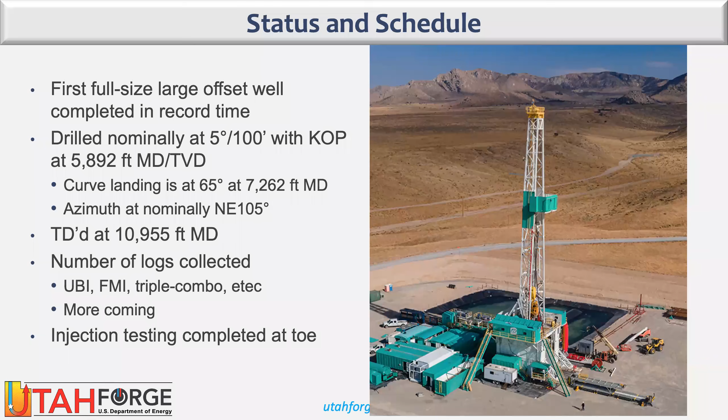The curve landing - as it came out of the curve, it took it all the way down to about 7,200 feet measured depth, and ran at a 65-degree inclination. The total depth of the well was just shy of 11,000 feet. I'll show some of those things here in a schematic.

As I said earlier, the kickoff was at about 6,000 feet. The blue dashed line was the plan, and the slightly curvy line is the actual well trajectory of the well path. We did collect a number of logs here for different stages and levels - we have some ultrasonic borehole imagers, formation microimagers, some standard logs, and a misspelling by Podgorney on the slide. We are intending to collect more logs in the very near future.

Getting equilibrated temperatures in this well as well as some others. We did a number of injection tests at the toe of 16A as well that were completed, and a number of areas of core were collected here, in two different locations in this well. We're pretty happy with it, and we're ready to get started doing some real work in it.

So that's kind of what we're building up to here, with preparing not only the site but also preparing some of the models. So, current and pending infrastructure.

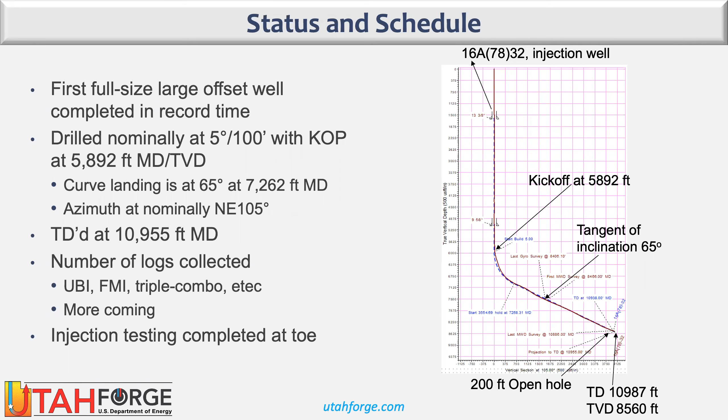Here's an air photo looking from nominally the west, or looking northwest from the northeast, I apologize. This is all on the FORGE site. Our pilot well, the 5832 that was drilled in 2017, this is the pad for that. So this is for reference, and there's our north arrow. A couple other existing features - in white are things that exist right now.

Some seismic monitoring wells exist. Well 16A, 7832, that is our large offset well. This dashed line is the approximate trajectory of that well in the subsurface. It ends right about here. This is in the Magley Wash, essentially a little bit off in the Magley Wash. This well was also just recently drilled.

5632 is a deep seismic monitoring well, drilled to over 9,000 feet measured depth. It's shown here in yellow, along with some additionally planned wells - WOO-1, WOO-2, 16B, essentially our production well. This is our plan for our injection well. A production well would also be planned here on the same pad, and two additional testing/seismic monitoring wells are currently planned. So the near-term schedule - this is what's important here.

These are taking a little bit of wiggle room here, but nominally in June or July of this year, so just coming up next month or the month after, we'll drill WOO-1 here as a deep seismic monitoring well and a testing well for tools and equipment. What's important is getting this done in July, that way we'll have fairly deep coverage at reservoir depth.

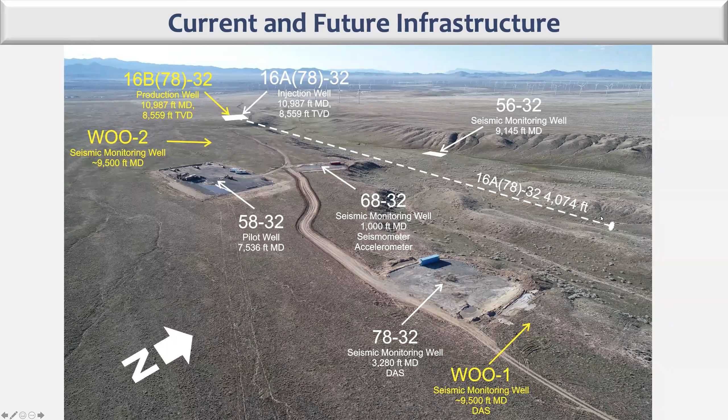The important part is this well will be completed and able to monitor before we begin doing testing in the toe of 16A. So in August, September of this year, we'll stimulate a portion of the open borehole, the open toe of 16A. Additionally, we're planning on doing two cased zones - we'll do some perf, plug and perf, and do some stimulation in different areas in the toe of 16A.

We'll have deployed deep geophone strings. We have distributed acoustic sensors in a number of those deep wells. So we should have really good coverage, really good detection.

Coming in next spring, nominally we just loosely planned for April of next year right now, is drill the production well, the 16B well, to intersect and begin to prepare to do flow testing at the site. Late next fall, October of '22 give or take, stimulate 16A and B as necessary and test newly created reservoir. So that's when things really became really important.

As we go further into the testing, March of 2023, we'll drill that second deep well here - this location is approximate, but drill it in here. Then in April of that year, we can start some long-term circulation tests. So a lot going on, a lot planned for the next 6 to 24 months, give or take, at the site. Very exciting time, lots going on.

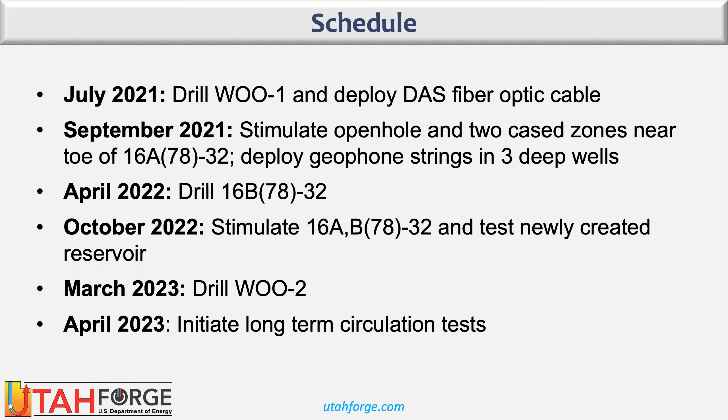Very, very fun. So I want to talk a little bit now about the modeling and simulation that we've been doing and give an update on that as it relates to all that's going on here. But first, I just wanted to introduce the people active in the FORGE modeling and simulation team - and I would say active in the team, because the team has changed as the stages of FORGE have evolved. It's grown, we've had some people come, some people go, but I just want to say who's active right now. I lead the team still.

Alita Finella and Tom Doe at Golder have been working pretty hard on DFN development, stimulation upscaling - or, I've got to hide my camera display here, I'm sorry, it's covering some of my screen, I'm trying to make it go away.

Okay, so back to that. So Alita and Tom at Golder are developing the DFNs, analyzing the logs, doing some stimulation modeling, upscaling of permeability, upscaling of the fracture networks, etc. Branko Damjanac, Zarisa, Murillo at Itasca. They've been focusing on stimulation modeling, stress analysis, MEQ forecasting.

Pengju Xing, Pranay Desai, Alex Gauratrov at the University of Utah, as well as, I don't want to forget to mention, John McLennan, my close collaborator, been doing stimulation modeling as well, stress analysis, looking at well completion, different configurations and different well designs. And lastly, I want to mention some of my colleagues here at the INL, Jerry Liu, Chandu, KT, Lynn, David, Hari.

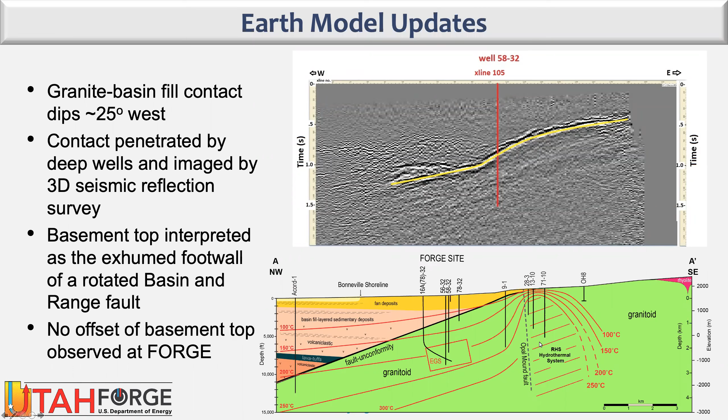We are still waiting on additional data going into the Earth model, things like new temperature logs; we don't have full equilibrium temperature logs from those new wells, but those will all get built in as well. So for right now, the main change we're pushing in for the Earth model update is the new top of granite. It is done. It is in our Leapfrog model, but it is not published yet. So we haven't ported that out and published it to the community just yet, but we will do that shortly.

Moving on to the DFN. So the status and the revision of the DFN, or discrete fracture networks. We did actually collect very high quality FMI logs in the new well. What we're showing here is the work from Alita Fanilla. And I should have said from the previous slide, it's work from Hari Nupani at the INL. This is Alita Fanilla at Golder's work.

And so we put a lot of work recently into the relationship between hydraulic apertures and mechanical apertures, from the information we get from the FMI logs. Essentially the mechanical apertures from the FMI are generally coming in the range of about 0.1 millimeter, while the hydraulic apertures from the well tests are a couple orders of magnitude smaller. We use these things to push through here.

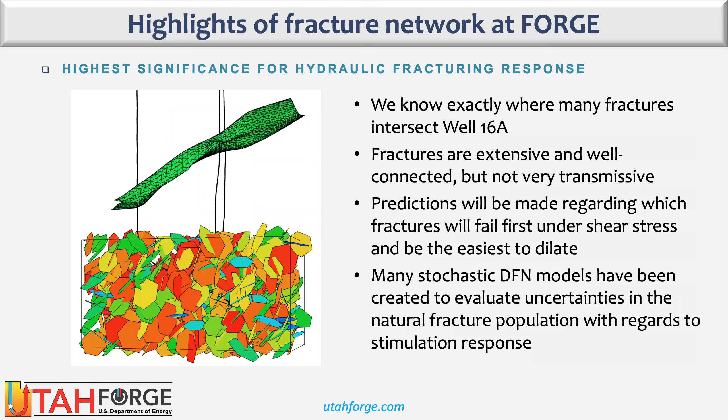I'm going to move on to the native state models, the continuum models and meshes. We're starting from the Earth model and also taking the information from the discrete fracture networks and moving that into our native state or continuum-based models for the site. I've covered this before, but we've developed workflows so that all the data can be transferred from the Earth model to the meshes. It's a pretty critical aspect here.

What we usually end up sharing with the community is essentially just point data, CSV files with cell center and nodal data, so people take the information as a scatter and build their own meshes or conceptualize their models the same way using the same data. I'm just going to move on. So we're actually in the process right now of creating new meshes.

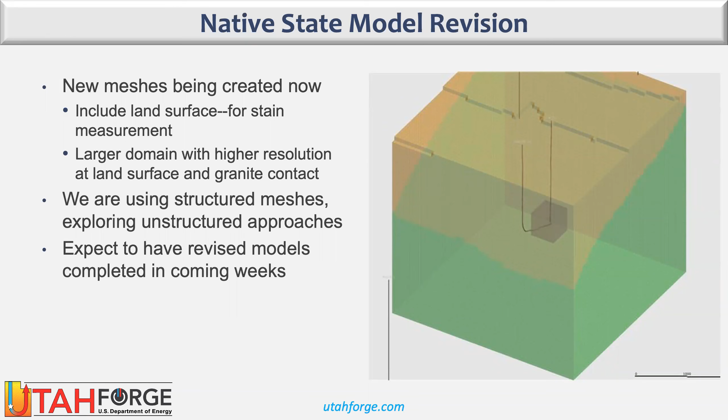Some of the other things going on with continuum-based models that I wanted to show. I'm not going to go into a lot of detail, but we are doing some heat extraction and well design modeling, essentially coupling well hydraulics with the reservoir model, using computational fluid dynamics and Navier-Stokes type equations for flow within the pipe. So we simulate the flow inside the pipe, the steel, the cement, and the structure around it, and couple that with the reservoir model, primarily looking at completion factors that can affect the production temperature.

So we're looking at things like number of fractures or upscaled permeabilities, or discrete fractures. We can take handoffs from either FracMan or from our stimulation models in XSite from Itasca. Looking at perforation, like plug and perf, limited entry type scenarios. We can look at number of perforations, perforation size, different wellbore diameters, different friction factors in the wellbore and such. We're working through ways to have recommendations for the site design team for how these wells can be completed. We also look to the community, the people on this call, and some of our R&D performers to help guide or add information to that discussion.

Now, simulating the stimulations. I'm transitioning into primarily the work of Pengju Xing at EGI and Branko and his team at Itasca.

So the objective of most of that stimulation modeling is to design and optimize stimulation strategies so we can connect the injection and production wells. We did hold a stimulation working group meeting last month virtually, where we reached out and presented some very preliminary models based on our old DFN and our old native state model.

To parameterize the stimulation models. But what we're doing it for was to essentially have some ideas of some of the behavior we might expect as we stimulate 16A, and the end goal is to try to come up with essentially a base stimulation protocol, and then look at some variants of that. So when it comes time to do those stimulations, we have a pretty well-informed decision.

So in building up to that, I won't go through the table here that has some parameters on it, but building up to it, we did a whole bunch of pressure history matching for the injection testing in the pilot well in 58-32. That was presented earlier this year at the Stanford workshop, and we also did some simulations of 16A in the toe with the current DFN, not the updated one I just showed that's been done in the last few weeks. And we're actually right now launching a new round of 16A stimulation models.

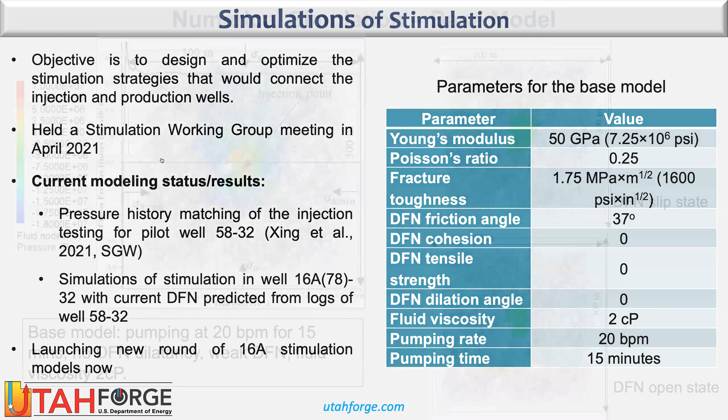I would say that Branko, Pengju, and the team have an ARMA presentation that I shamelessly stole some of these next slides from. So our base stimulation model essentially is pumping at 20 barrels per minute for 15 minutes. We don't have any dilatancy in the fractures. The fractures are weak and a fluid viscosity of 2 centipoise.

And in doing that, I'm showing some results here. As I said, I shamelessly stole these from Pengju and Branko, but looking at some of the fluid pressure in and around here, essentially you can see the outline of the DFNs that came from Alita's interpretations in FracMan and handed them into XSite, and look at different slip of fractures as well as open and dilation states.

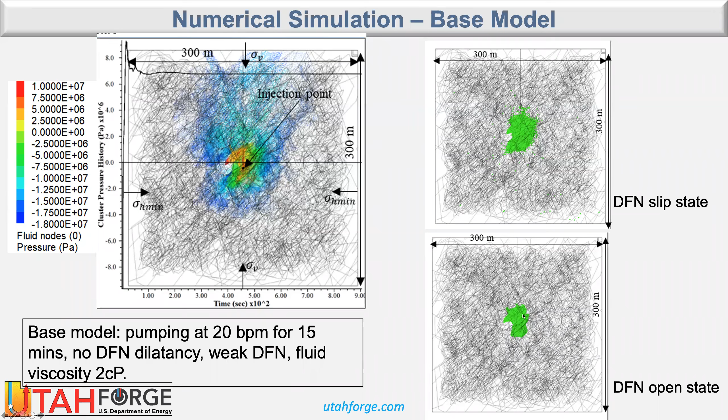And importantly, what it all comes down to is trying to come up with some reasonable stimulation indices. These are based on our old preliminary models, but we're trying to look for slip area, open area of fractures, and stimulated volumes over a number of different cases of DFN. You can see some of the pumping rates, fracture dilation, stronger and weak DFNs in different fluid cases. So I won't go into these things, but the point of the matter is we're just trying to see which one of these will actually produce the best stimulated volume and open area with the least amount of potential for induced seismicity.

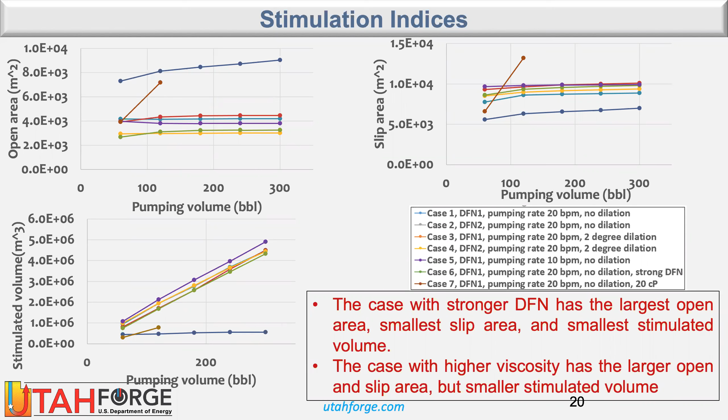Now, this has been covered before, but all the data that we produce will and does make its way to the GDR. A lot of things I've just presented today are hot off the presses or haven't even been fully internally reviewed, so they're not really suitable for external release. But be watching, and if you have questions or want this information, just shoot me an email or put a note in the chat and we can follow up. As we get these things into the GDR, we'll make note of it here and on the forum as we go forward.

So first one here, topic 2, I'm going to give a little bit about the work proposed by Livermore National Lab. I won't read the title here, but I'll just go to the slides as we go forward. So in topic 2, closing the loop between in-situ stress complexity and EGS fracture complexity. And I can't see my whole screen because of some of the notifications I'm getting from the system. So the PI here is Peng-Cheng Fu, co-PI Andy Bunger at Pitt. Peng-Cheng is leading the modeling.

And the reason I wanted to cover some of these is that as these projects actually begin, we will hold a monthly modeling working group meeting where we could talk with each other as a community. We do see FORGE as a community-driven effort. And so having the open communication between the team members as we all approach similar goals, that being making EGS something that we can actually rely on and be commercial.

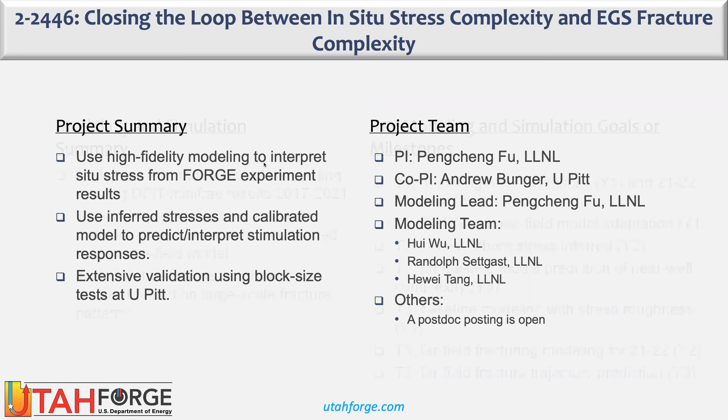Some of the high level summary of this project is high fidelity modeling to interpret in situ stress from our experimental results at FORGE, then use those inferred stresses and calibrated model to predict stimulation responses. What's nice about this project is there's extensive validation using block size tests at Pitt. I'm not going to go into detail. I actually do have some information on the key milestones and goals of each project. But I'm not going to read all these things, but I just want to show that these projects all range over the next 3 years, in some cases up to as many as 3 years.

And we're going to work really hard to coordinate, make sure that if one team relies on another, we're coordinated to the degree where we can essentially minimize duplication, but not avoid it. I think it's good to have multiple people doing the same thing with different approaches to look at some potential variability that we might see, but to make sure we're all well coordinated in what we do.

So the next topic I'm going to go into is topic 3. I did hear back from Rice University, Jonathan Ajo-Franklin, whose modeling lead is Ahmad Ghassemi at Oklahoma. Their fiber optic geophysical monitoring and reservoir evolution at the FORGE Milford site. And so they titled their project Fogmore at FORGE. And you could read it off there. People after my own heart with acronyms.

So essentially they intend to develop and deploy state-of-the-art monitoring solutions using distributed fiber optics, primarily DAS. As I mentioned earlier, we do have a number of wells that already have DAS, and we're working on making sure that we, as a FORGE team, can meet the needs for these external performers. They really want to improve the current microseismic based representations of fracture network, which becomes very important as we look for not only reservoir creation, but reservoir evolution and reservoir operations.

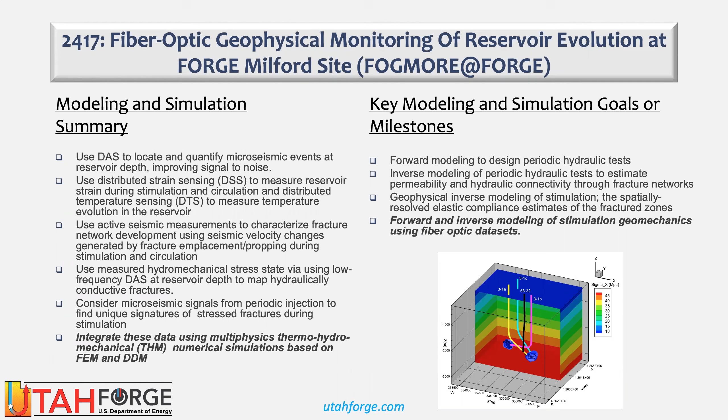Topic 5 is the last topic here in the solicitation. And I did get 3 PIs to provide me some information here. The first is Derek Ellsworth at Penn State. Their project is Seismicity Permeability Relationships Probed via Nonlinear Acoustic Imaging. Looking forward to this as well. Experimental characterization project upscaled via modeling. I'm not going to go into all these things, but they would upscale some of these acoustic indices to a reservoir scale as diagnostics for stimulation and management.

And you can see PFC-like models, or TOUGHREACT, TOUGH-FLAC at a reservoir scale, depending on what scale they're using. A number of co-PIs there, I won't read them all, but once again, some of these key milestones are the micromechanical modeling at the laboratory scale and upscaled reservoir scale modeling at FORGE. So looking forward to this as well. This is in quarters here, but going through essentially the next 3 years of FORGE.

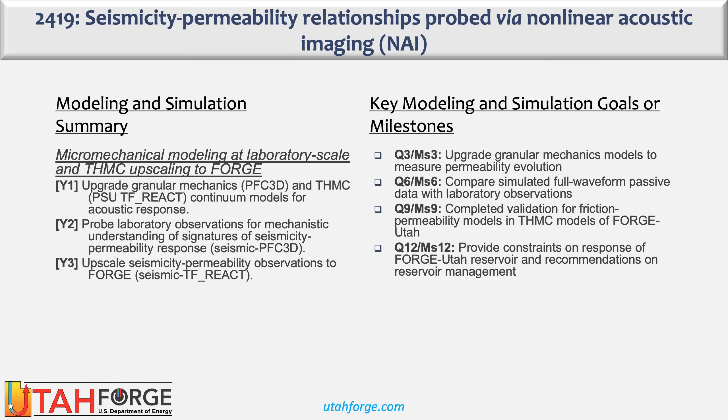So the next project here is a team led by Laura Pyrak-Nolte at Purdue, and they're looking at the role of fluid and temperature in fracture mechanics and coupled THMC processes for EGS. A lot of their project is going to predict the interaction of fluid and temperature-driven fractures along with frictional interfaces. Looks really interesting, ultimately impacting long-term efficiency of the stimulation process in EGS systems.

I won't go into the sub-goals here. We're looking here... I lost a slide in there. I apologize, I think there was a second slide, but I must have lost it, Laura. So I'll look a bit more here.

I think this is looking at some of the mechanistic understanding of the frictional and deformational behavior of faults and fractures in EGS, and all of topic 5 has a good mix of experimental and modeling work. That was essentially the goal of this. I'd say the modeling team is led by Sandia, with other people joining between Sandia and a number of universities. Very good looking team here.

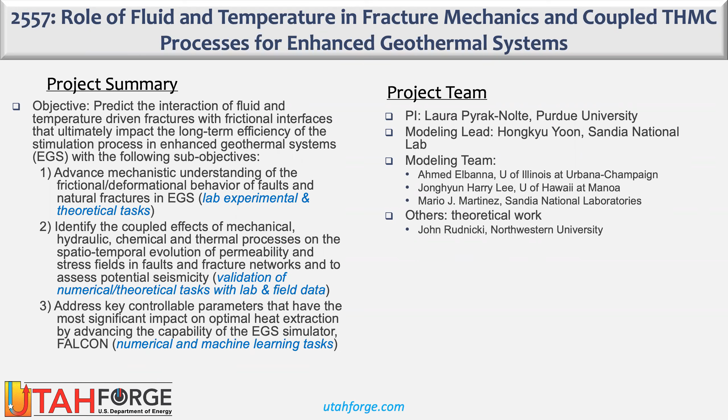The last summary I got was from the team at USGS - David Lockner, Josh Taron, Tamara Jeppson - looking at the evolution of permeability and strength recovery of shear fractures under hydrothermal conditions. They're looking at how THMC processes affect the stimulation and sustainability of fracture networks in EGS - that's the highest level of what they intend to do. They're building micromechanical models to follow the temporal evolution of shear and static fractures, and using these to upscale and put them into reservoir-scale THMC work, if I'm not misstating here.

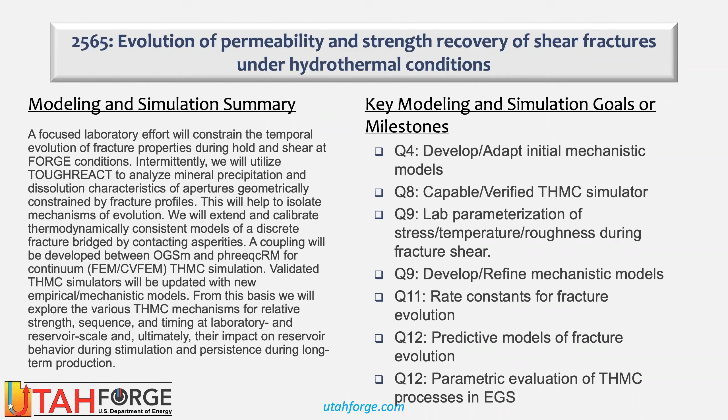A number of things here - this is also a longer-term, 3-year project, but all this will fit in well with the operational structure and goals for Forge. So I think that gets me to...

I see where my other slide went. So this, I'm sorry, is the second slide for the Purdue application. I don't know how that happened, but I apologize - my slides somehow got blown up and out of order.

I think that gets me to the end of what I wanted to say. I'm going to look through the comments to see if we have any questions, but I'll leave this slide up and do my best.

Okay, so I'm looking at the questions now. I'm not sure if you can see them on my screen. Question from Mike Dew: what geomechanical stress modeling software, what fracturing design software, what simulator are you using?

Basically for the Forge team's models, we're using a number of different codes for the simulator or fracturing design software. Primarily we're using Itasca's XSite code, led by the people at Itasca, Branko Damjanac primarily, and his team, along with some folks at EGI. I won't get into the details of the solution procedures. For geomechanical stress modeling in general from native state, we're using the Falcon code - that stands for fracturing and liquid convection. That's the code developed and designed at INL for general porous media, multi-phase, multi-physics porous media applications. It handles THMC processes at different scales and different conditions. Hopefully that answers your question, Mike - if you want to follow up, please type in there.

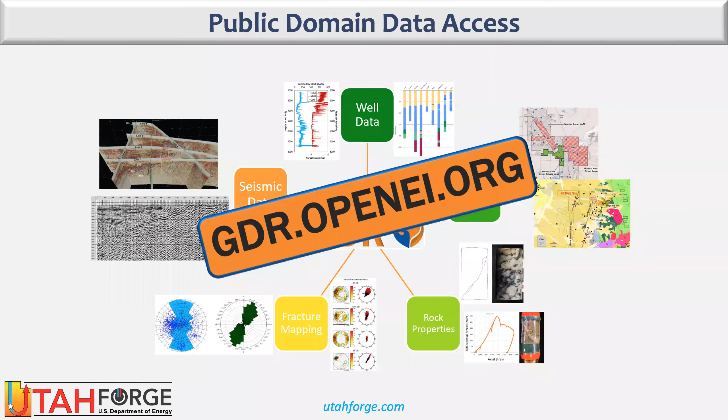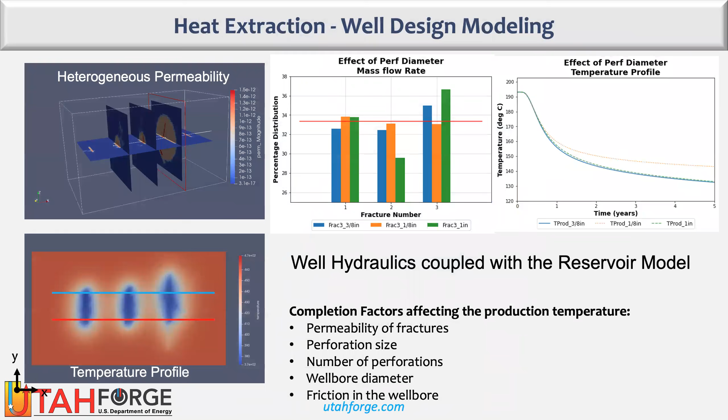For a system like this, I'm wondering if in the end the performance or behavior is going to be dominated by these larger fractures. They're actually not too scarce, right? Every 10 or so feet you get one of those. Is that a fair assessment?

So we were getting a fracture with a 4.5 millimeter aperture every 10 feet. We'd be losing a ton of fluid, and we didn't lose any. It's something we kind of worked through in some of our earliest models. We discovered this by trying to do history matching from injection tests based on the apertures returned from the FMI logs, and it simply could not come close to matching the injection data, because with something that large in the 4 millimeter range, you don't need much of a pressure gradient to push fluid into the reservoir. So we ended up scaling those mechanical apertures down by 2 or 3 orders of magnitude, maybe even 4, in the history matching models for the injection test to come close to getting a match.